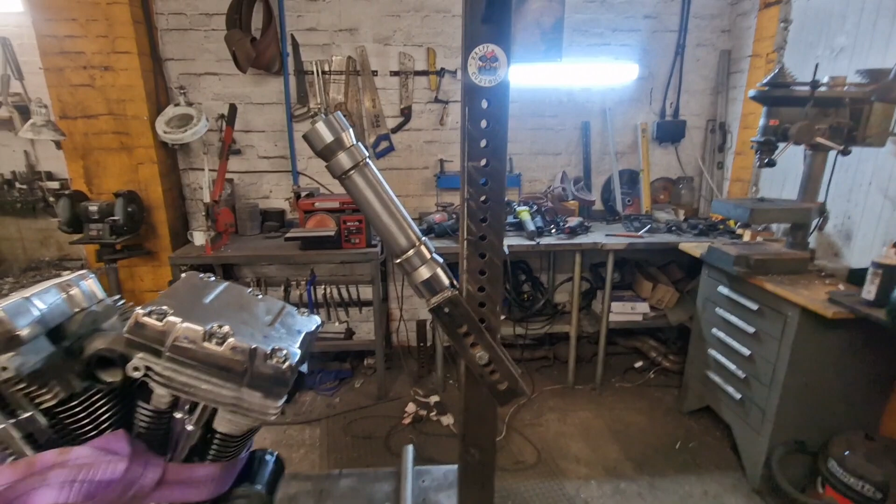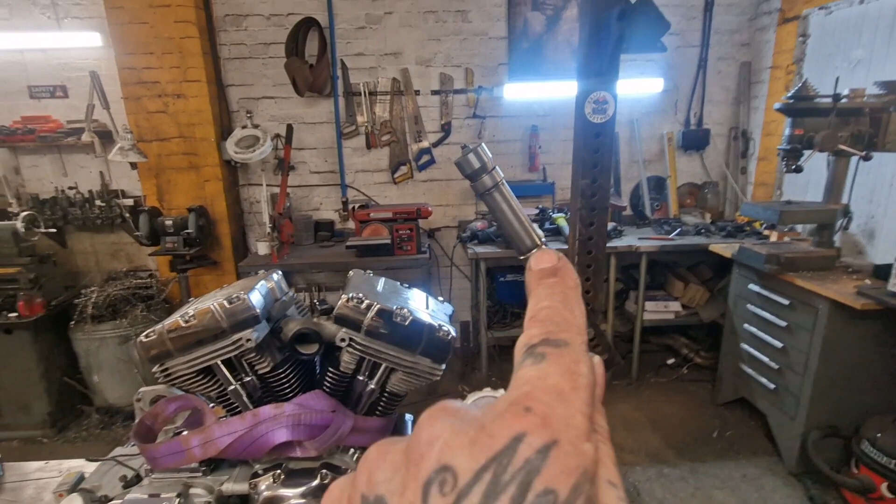I've run a line through the centre of the headstock to the bottom of the frame, which is the jig in this case. We've worked out the length and the angle. We've got 34 degrees of rake - I usually go 35, but we've got quite a short front end. So 34, it'll still look a bit chopper, man, and gives us the height we need on the frame. Yeah, I reckon, got to double check.

From my records and whatnot, I know that I want this gap here, so that's not a problem. We've just kicked that front end out about an inch because it's belt drive, it's fixed length at the back, we can't make it any longer this way. Belt won't fit, so we gained an inch at the front, if that makes sense. That's how we work out where the headstock goes.

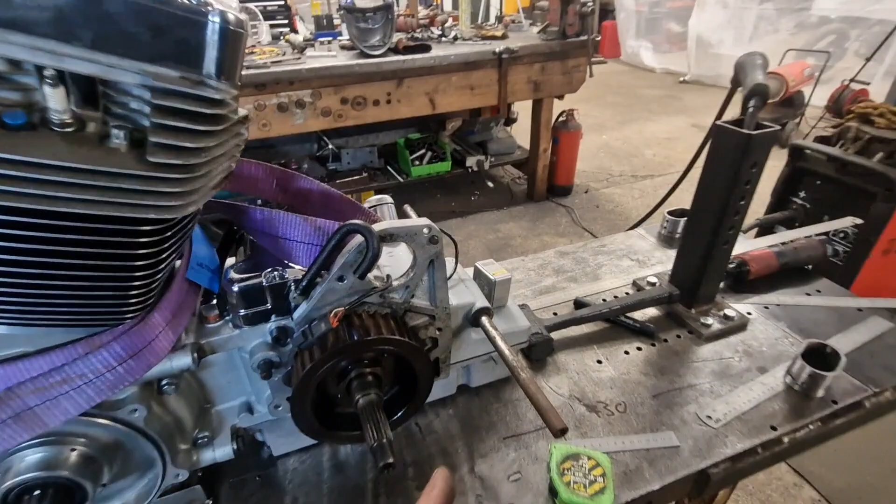The engine, we put a bar through the rear engine mount, which is the swing arm mount on the standard bike, and we use this to get a level off this way. Make sure it's square, and we measure off these lugs down to the edge of the table to see that it's in the middle. We've measured from the back of the bench to the centre of that bar to make sure it's square that way. So we're in the middle, we're plumb, and we're square to the table.

What I need to do is just check the belt clearance once we get the pillbox on, make sure the belt's going to line up. We know we want - wherever I've written it down, you probably can't see it - half inch from the axle plate to the edge of the pulley. So we want to make sure that works, but they only have a 40mm belt and this pulley's a lot wider than that, so we've got a little bit of playroom.

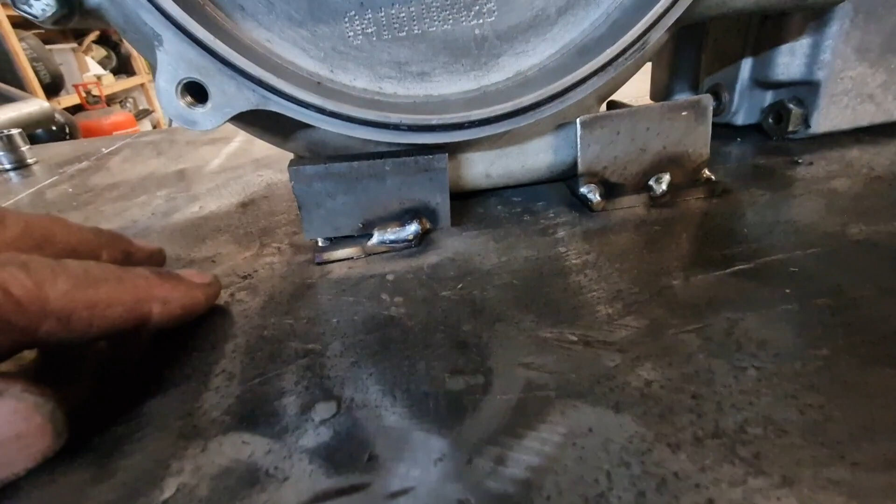And then I make these little bridges, these sprag supports. So there's a bit of angle iron on a bit of plate that's wedged under the motor, and that keeps it level. And then we put a tack on it to stop it moving this way. Same at the back.

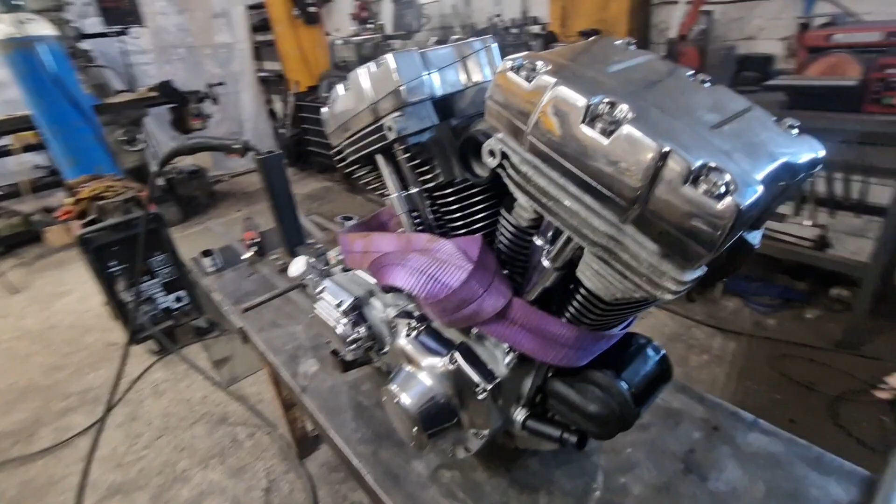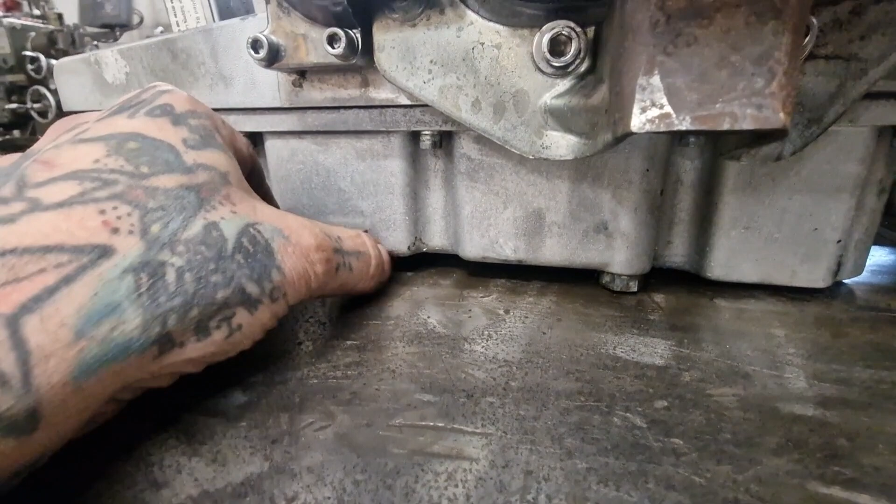And when we go around the other side, because it's held quite firm, like it's not really going to go anywhere, we do the same. Again, you can't really see, look, this one here - so we get a bit of angle iron, I need to space that up on a bit of plate, just so it's firm, and then we weld that to the bench and it can't go anywhere.

These are great for holding on because you've got a big flat sump - not flat, square-sided sump - so you can get brackets on, stop it moving. That'll have it left and right, and forward, that one goes forward, and not sure about the back. We might put something on the back.

We need to measure off the back wheel, 13 and 3/4, to see where the wheel's going to come, to see how much room we've got for a box section that we're going to need here to take this back loop off and these engine mounts off. They're quite monumental, they are. So yeah, if any of that made any sense, that's how we've reached this point.

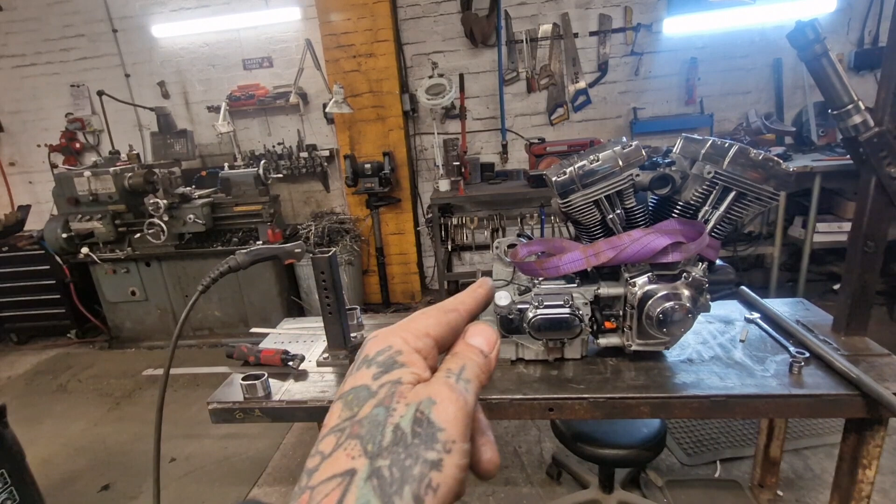I'll get those pillboxes on, and we'll check - we'll get a bit of string across from the front pulley to the rear pulley and see if it's half inch in, it's square. Yeah, it's running parallel, and then Bob's your uncle. We're all sorted, ready to start putting tube and box and engine mounts in.

If you look through my playlist, you'll see the M8, the Milwaukee 8 that I did a rigid on not so long back. I'm going to adopt the same policy for these engine mounts.

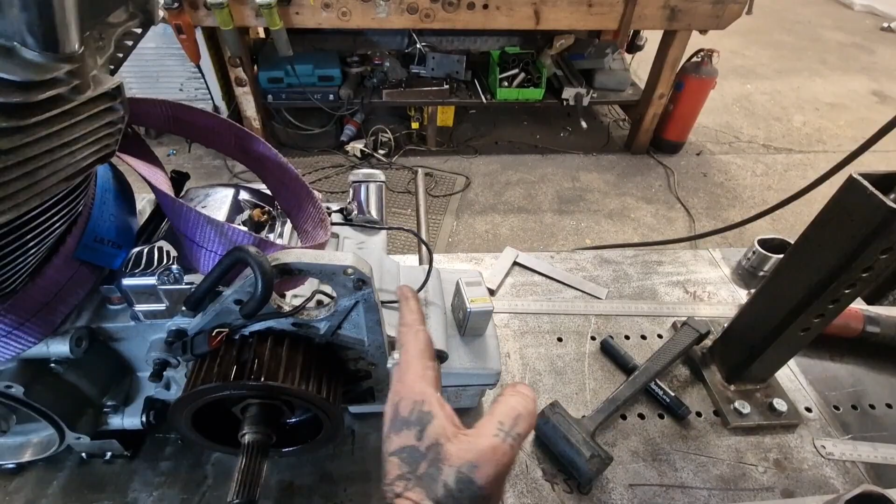So we had Isambard Kingdom Brunel, we're shouting as loud as we can, like Brian Blessed's big voice, on the rear mount, fucking grabbing it, because that's where most of the action is, with the drive being here. On the bottom mount, we're being firm but fair on the front mount - sorry, firm but fair, so not as heavy duty as them, but proper meaning it still. And on the top head steader, which is normally - I've got it on the bench - a rose joint, because these are rubber mounted, so it's a rose joint just to keep this true, stop it shaking side to side.

We're gonna be nice and kind, because these aren't designed to take a proper solid head steader, and I'm not 100% whether they just use the same as on everything. They probably do, but that's my ethic. So we'll grab that firm, we'll hold that tight, and we'll go Billy Big Bollocks on the back there for the engine mounts.

Okay, pay attention, 007. Right, this for me is the hardest part.

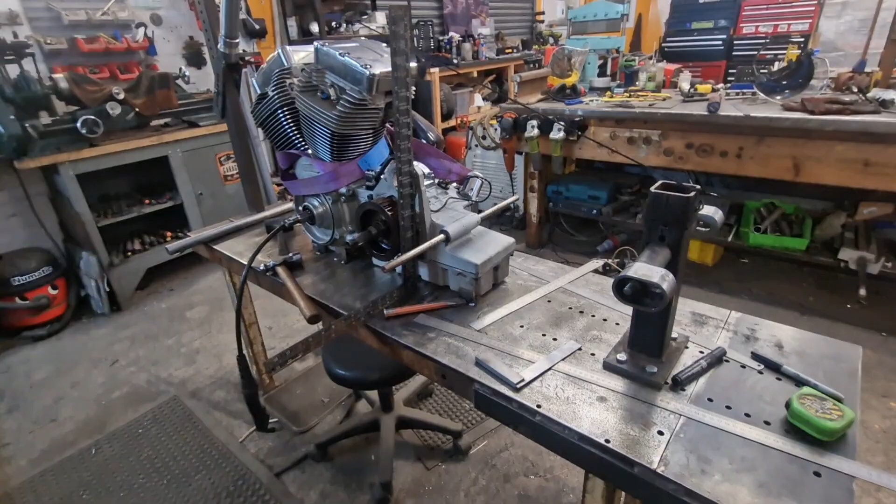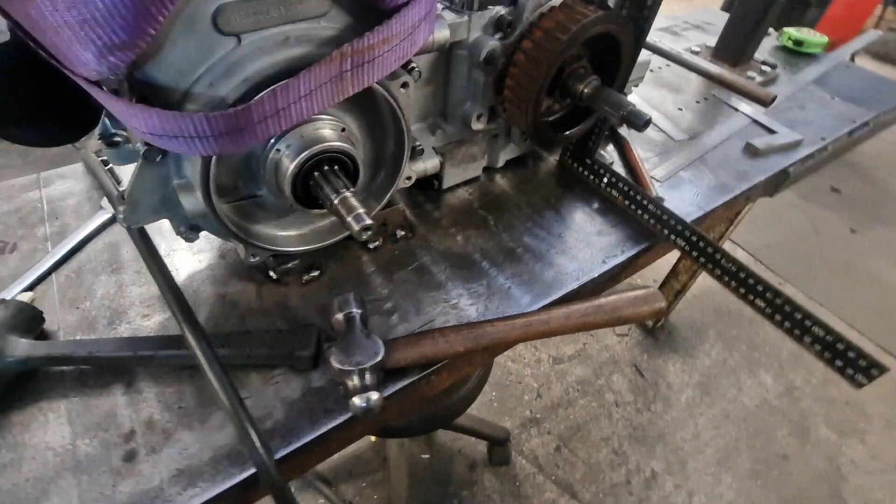People say all the time, why don't you make a fixture that the engine drops on or bolts on, that you can then skate about where you want on your bench. But they're all different, man, you know what I mean? I've got a roof full of fixtures I've only ever used once, so I don't bother.

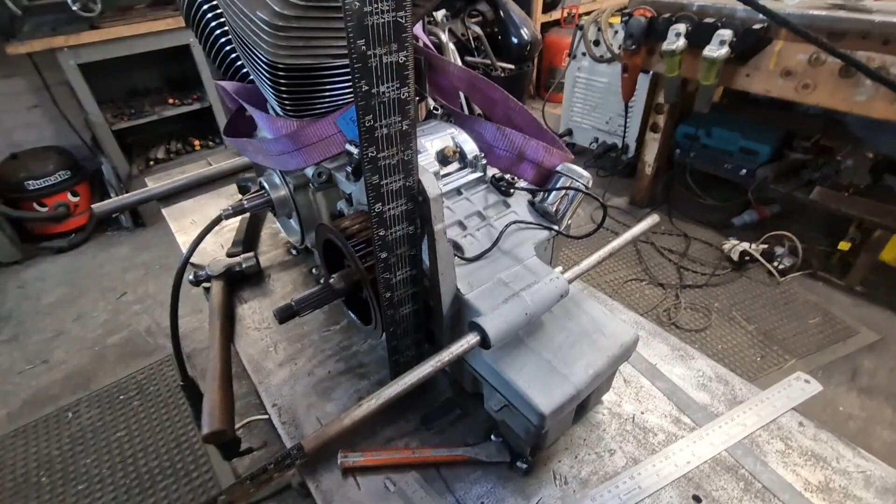I do it like I showed with the sprags and packers. What I've done is got it first and foremost so the belt lines up, and that's where the edge of the pulley comes in comparison to the back wheels. So I put a straight edge off the edge of this pulley, ran it along, Bob's your auntie, everyone's happy.

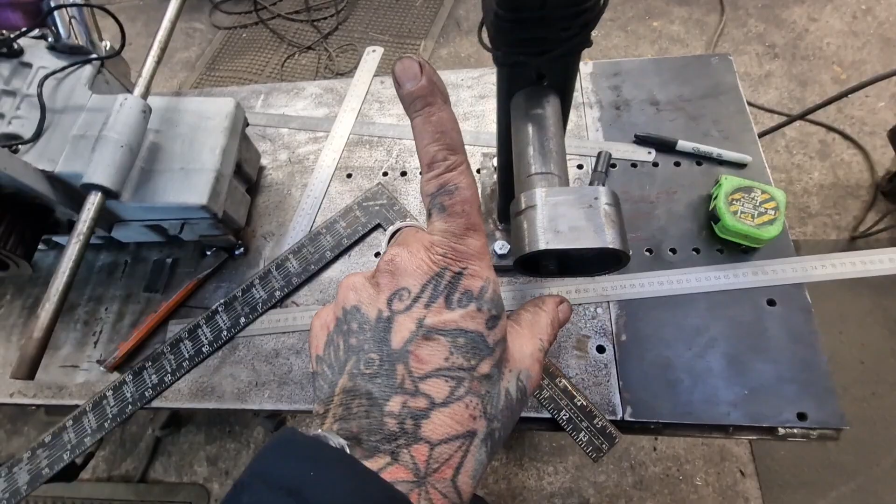And I need to make sure it's square. Like I said in the last segment, it's a couple of hours later for me now, so bear with. We measure back from here to the bench to get it the same. We put a zero angle finder on the bench, then put it on here to make sure it's zero, and put a square up there to make sure it's square.

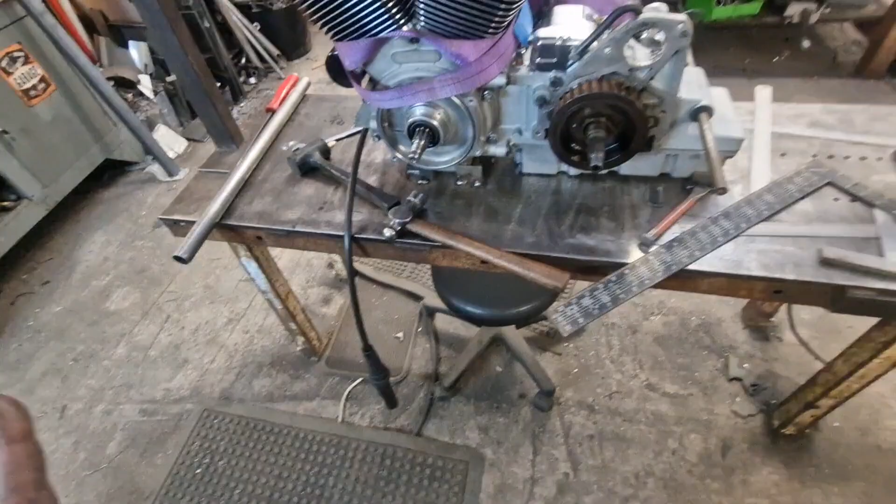Then I measure again - I put a straight edge across here and measure up from the edge of the bench to the straight edge at both ends. Just as a sanity check to make sure we're not messing this up, you know what I mean. It all ties in lovely.

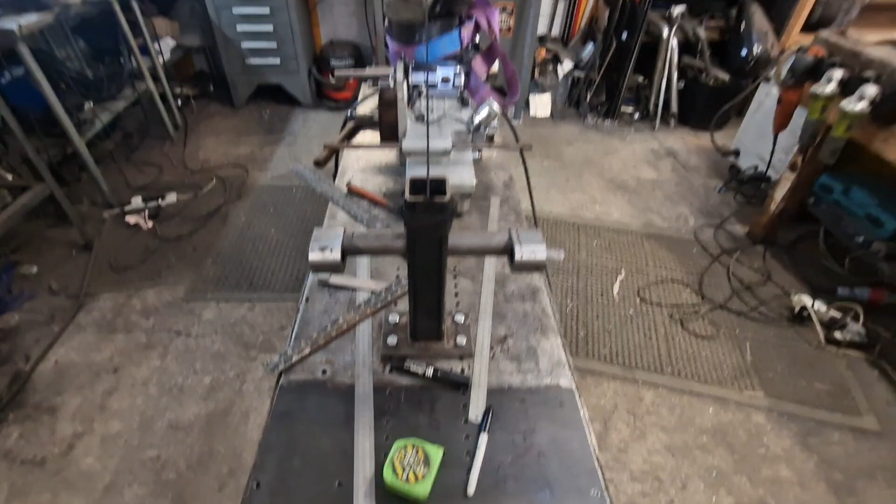So I'll strip that out, clean all the crap off the bench, but that is jigged up. There's the rear axle plates, that's 8 1/2 up, with 13 1/4.

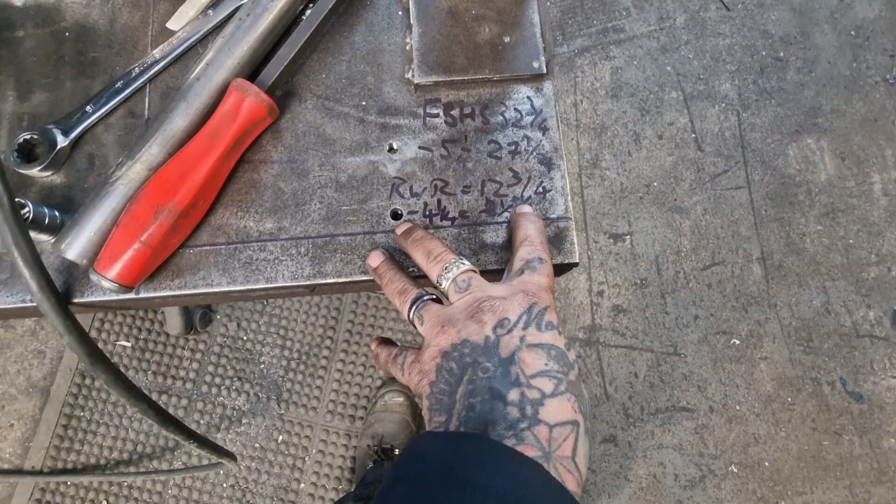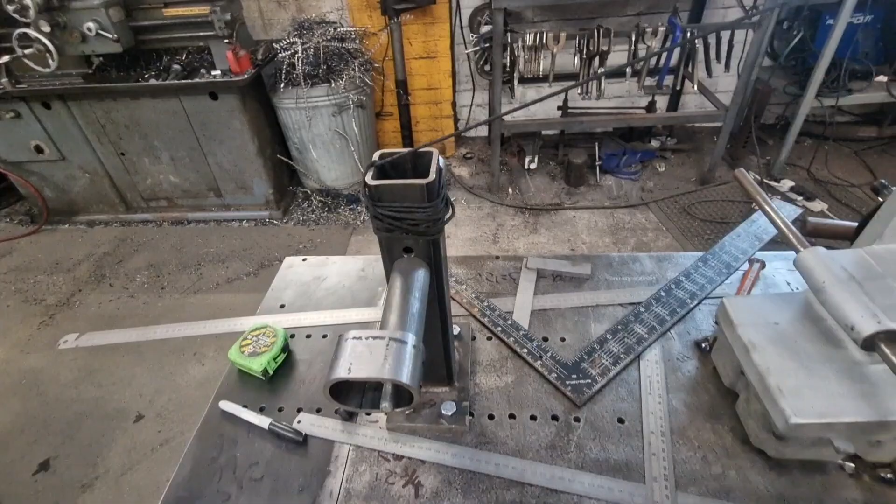I'm not reading it right. Rear wheel radius is 12 3/4 minus 4 1/4 ground clearance gives us that 8 1/2, which is what that is - that's at 8 1/2 off the bench. If I'm talking gibberish, please excuse me, it's about time for my morning coffee.

And the headstock set, how we said, that all fits through. So we've got 1 inch more ground clearance at the front than we have at the back - just about 5 inches here and 4 inches at the back. So when you're going along, that moves up and down and sits level. Everything lines up, we've got a decent gap here. We're sorted, ready to start laying tube, more or less.

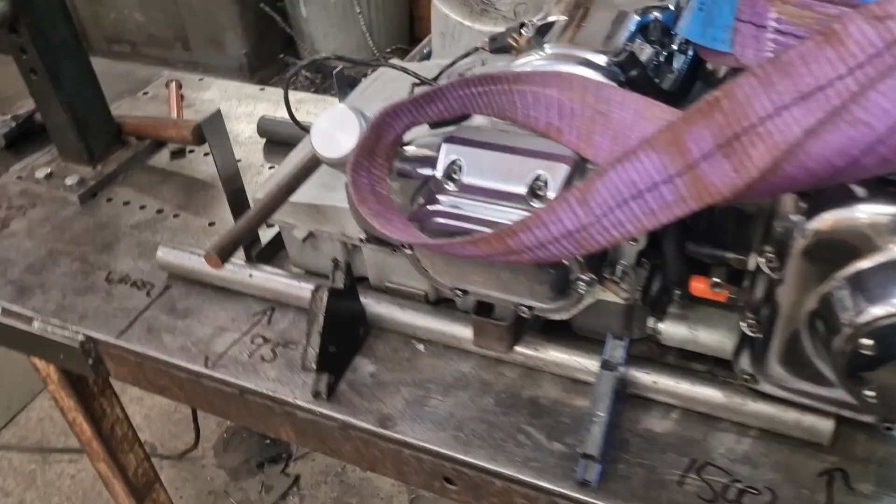Right, so with everything cleared away, more or less, we've laid out and mocked in the bottom rails. There is a slight issue - let me zoom out so it's not so jerky. There you go. I know this one's a bit tricky, I've done loads of these. 95mm from the edge, I'm happy with - it clears everything, it don't hang out, that's good.

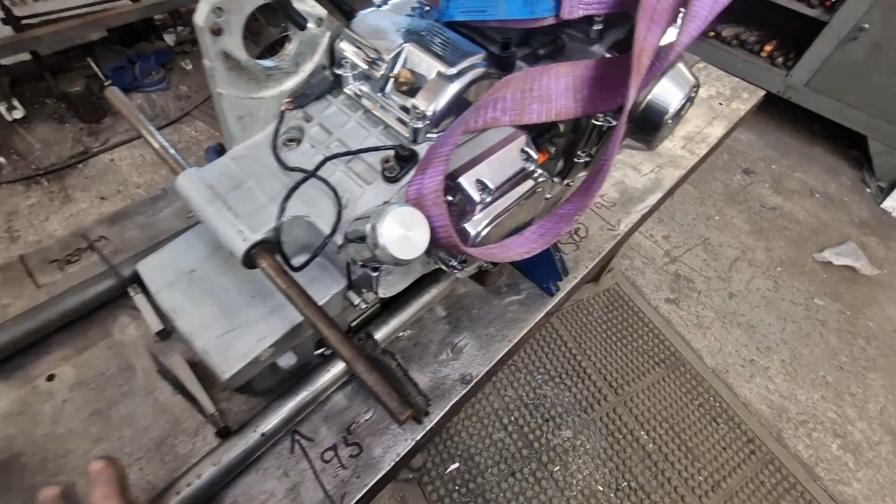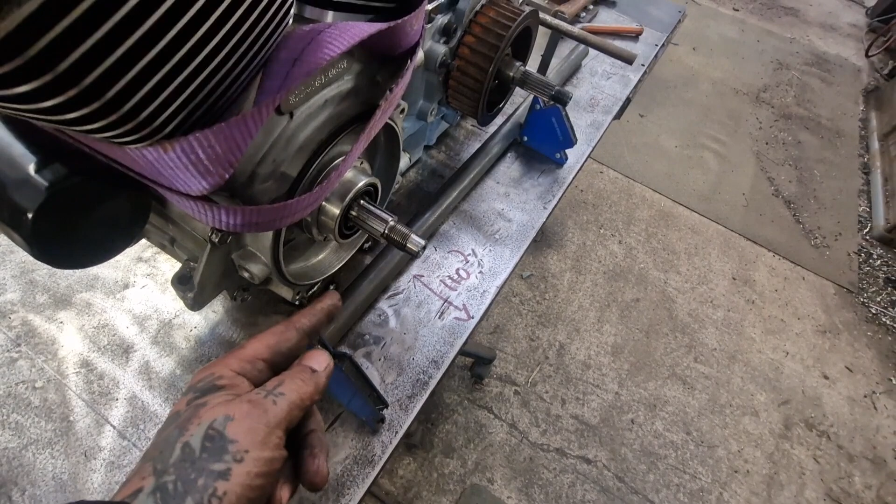This side, I'm waiting for the inner primary. I normally work to the inner primary because they're a funny shape and you need to thread this rail through. So I've guessed - all I've done is guessed at 110, which is not ideal.

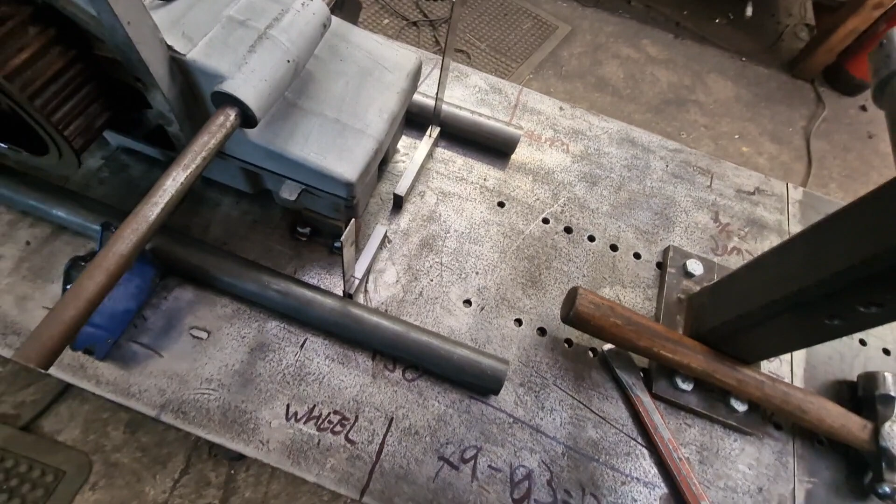What I normally do then is measure for a bit of box section across the back there, put the box in and tack it to the bench, and then I've got a solid foundation. It'll grow from there, like Odd Bod Junior.

So I'm a bit stalled out, to be fair. I don't want to guess this and then it's too short and I've welded it in and got to twat it off the bench and all that - I ain't doing that. So what I've done, I've got the bender in, set up, ready to rock and roll.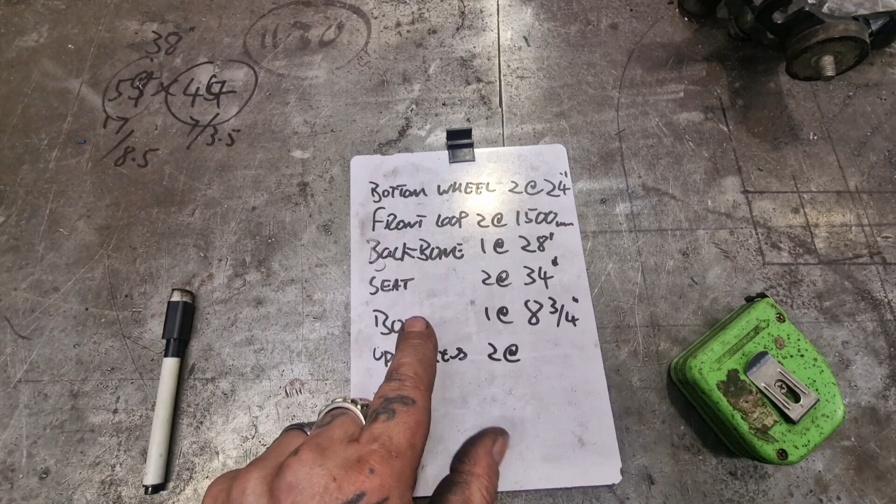I've done myself a cut list, yeah. So these are all over length, apart from that box, which I'm not sure about - I'll probably leave that until I've got the cover. But I'll get these rails cut, I've had a good guess.

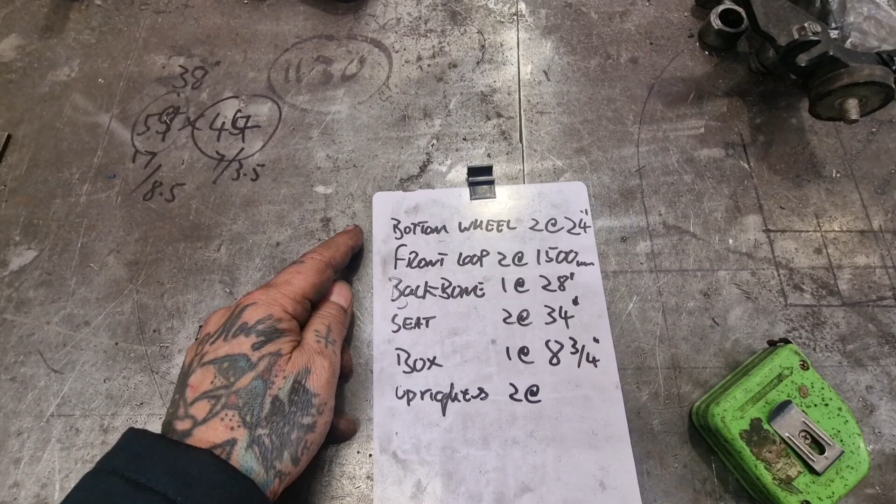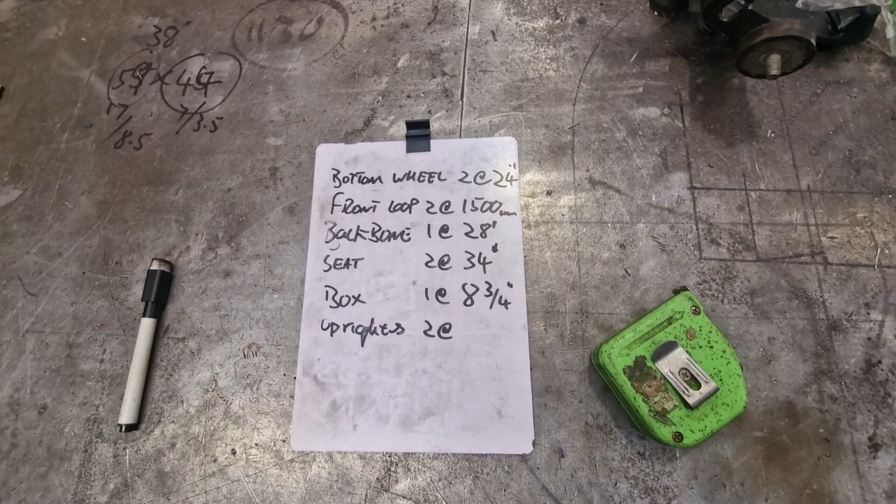Got the ones for where the wheel is at the bottom, the front loop ones. You'll see there's a mix of 24 inches, 1,500mm - I don't know why I threw that 1,500mm in there, but there it is, we're all right with that. I'll get those cut and await that inner primary, I guess.

Although I could make a start - I could bend these up and have them running through, because they're going to go where they're going to go regardless of that, so I could do that. I could also get the backbone in, although it's a bit arse about face for me, so we'll see.

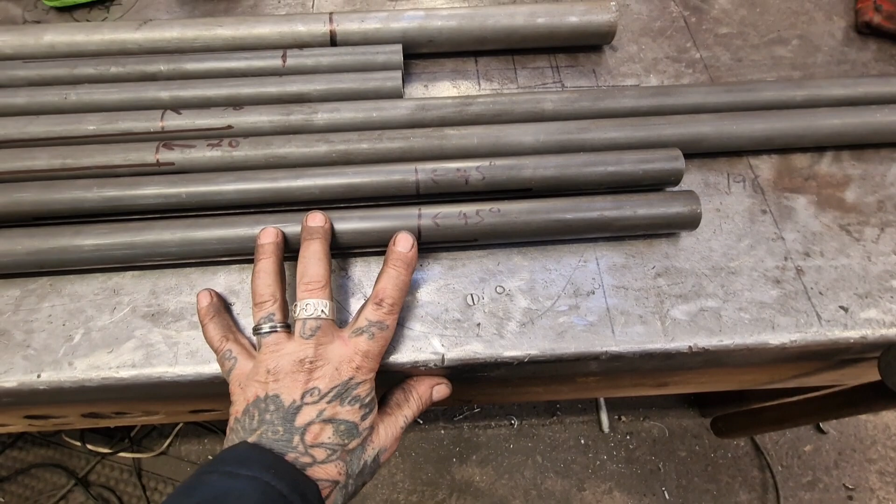Right, so what we've ended up with is a frame in kit form, look. We've got all the rails. We've worked out all the rails and cut them too long, and we've worked out where the bends are going to be and allowed ourselves a bit of a guesstimation, because it's not the easiest thing to map out where this bend needs to go and what angle it is.

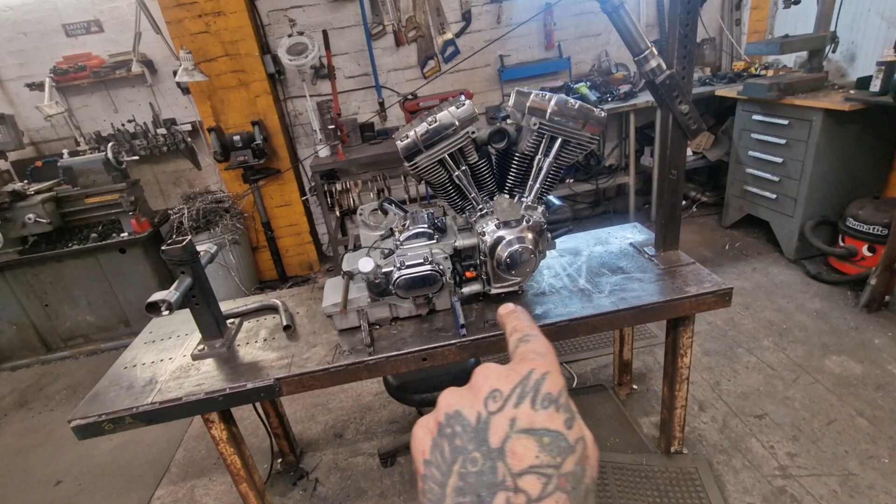We're going 700 from the end and 70 degrees, which with my split rule and my cheater - I'll show you my cheater, look, if you're interested. This is a bit of... oh, it's not my cheater, hold on, bear with. Here's my fucking cheater right in front of my nose, look.

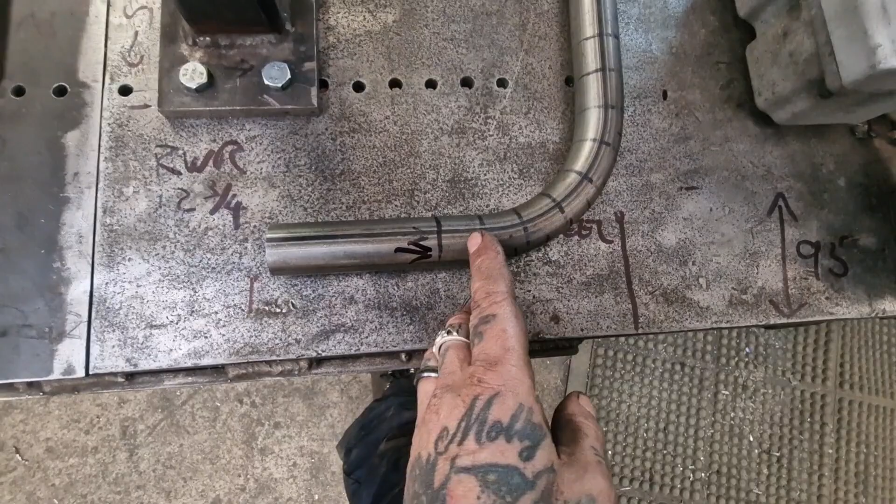So 4 inches from the end, the bends start, and they're inches, yeah? And these marks are degrees, so I can count those off. I can go 10, 20, 30, 40, 50, etc. And I can see how many inches of tube it takes to get from there to there where the bend is. And then I can measure off to where I need to be. So that's what I've done.

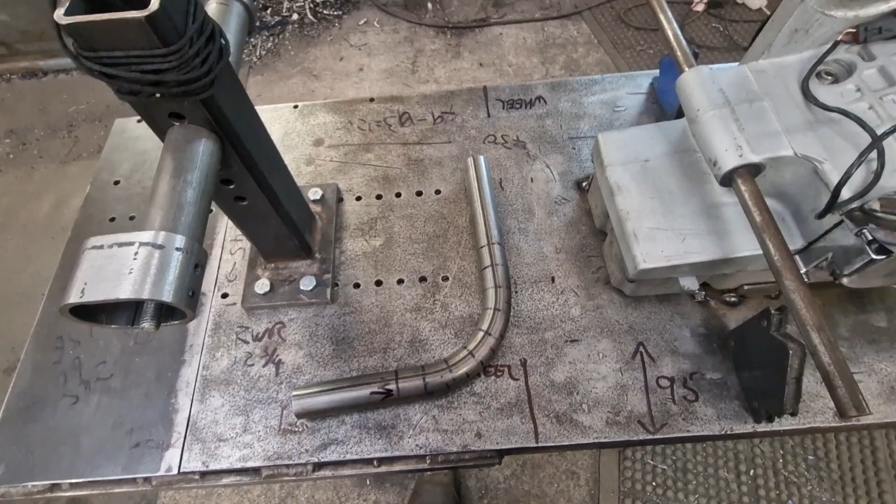I know the backbone's coming here and it needs a kink in it. I've already offered that up, and it don't want to be straight. It wants to kink from here down towards the seat rails. So we've marked that, and we'll do that. We'll slice that and bend it and weld it up, because I can't bend that. And so on and so forth with the other rails.

There's the bottom rails for the bottom wheel, where the bottom wheel goes. They're bent at 90. We're going to do a U, much like Andy's Milwaukee 8, as I mentioned. These are the ones that can be trickiest, so I'll probably do those first.

I'll just show you what I do, look. So I mark where it wants to be, and I mark on 70 degrees as a fucking reminder, because I forget my bollocks if they weren't in a bag. And then I put a straight line, just put the marker pen and move it along the bench to give myself a bit of a straight line, and I'll line that up with the top of the former. So I can always put it back in the same place. Yeah, so we're on that line, back of the former. So on and so forth.

I suppose really I better finish my coffee and then fucking get my big boy pants on and bend them rails to 70 degrees.

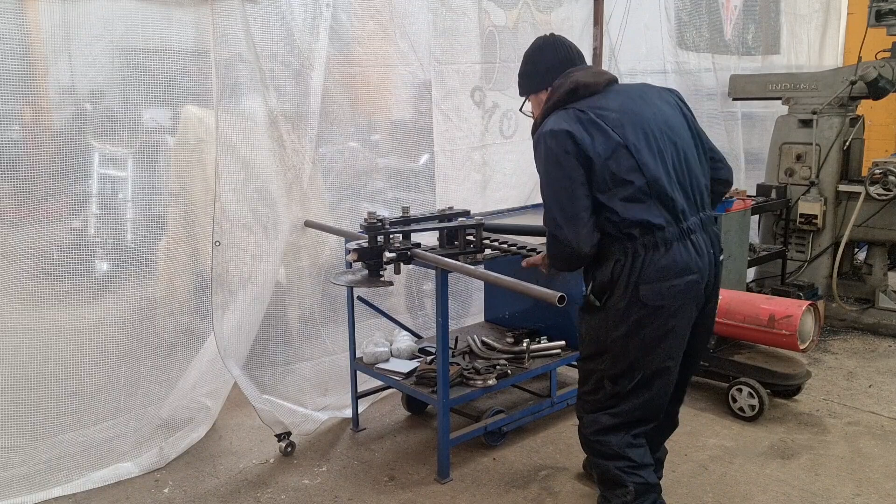They worked out lovely, look, I reckon. Maybe snug them back a bit more, but we're going to be getting close to this, and we don't want to be, do we? You know, we have come out, the front's come out a couple of inches to give it a better stance, like. So, yeah, that worked out great. But fuck me, I forgot how hard that shit is to bend.

Right, what I'll do off camera, I'll do the two seat, the bottom wheel, back wheel rails, they form a U. They're joined together where the box section is that I can't cut yet. But we can pre-bend them to 90 off camera.

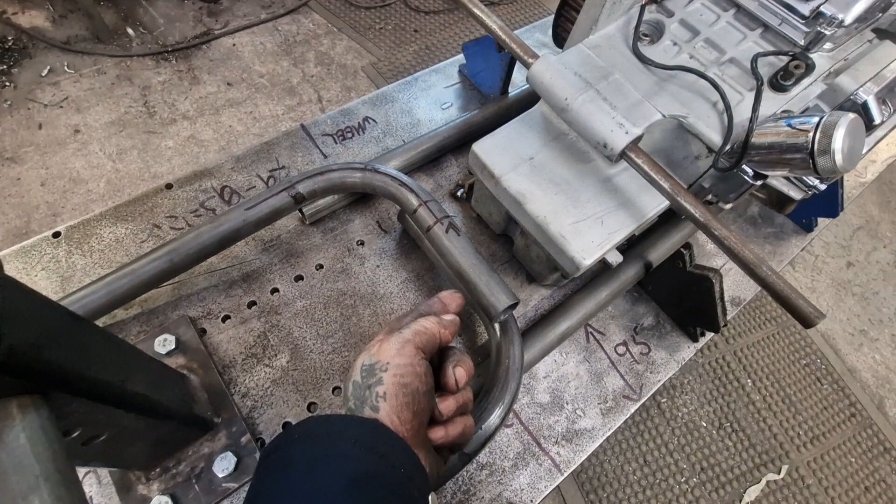So we're continuing on with the frame in kit form, available at - no, I'm joking. Right, oh fuck me, I'm bollocks. 90 degree bends ain't easy. You have to really fucking clamp the tube down before you start to form it, otherwise this creeps in the former and squishes out. So I've had 3 goes to make those 2.

There we go, so there's the front rails. There's the back rails. I think next on the order of operations, we're going to start and get the backbone in. That's what we're going to fucking do. We can do the backbone and the seat rails, can't we, without knowing where this has got to go and where the box has got to go. We can do the top of the frame to a degree.

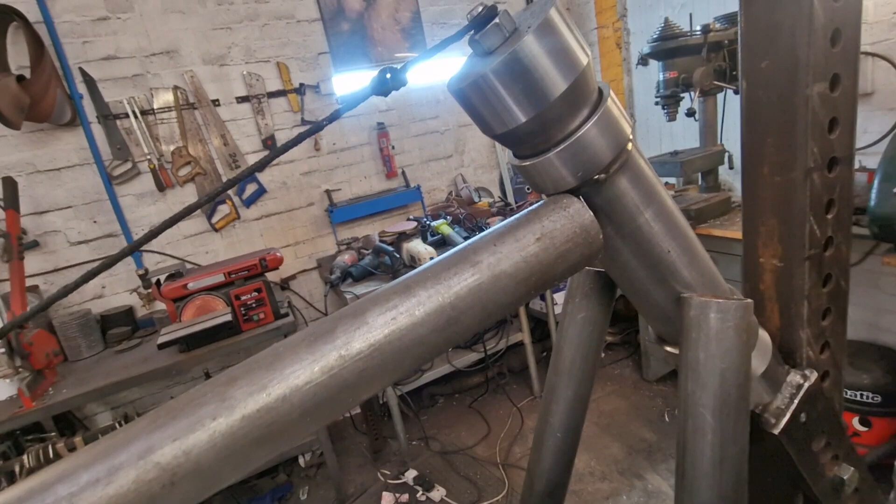So we've got this backbone. We know where it wants to kick in it. We'll offer it up first. And regular viewers will know my method. So we offer it up where it wants to go. We see it's got a bit of a chunk of a fucking gap there, look. So we slice the top out, shove it up and go from there.

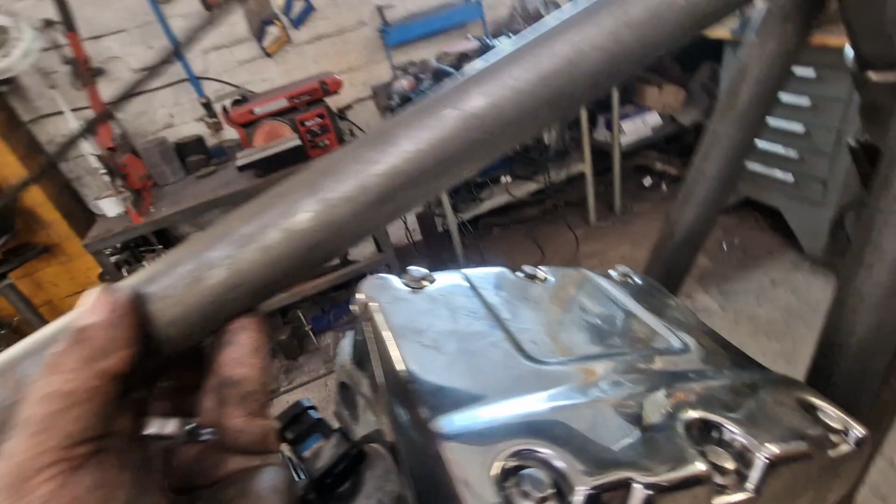Right, so with that suitably cut and given a quick fettle, we can see that it sits quite nicely. Look, if we just lift that up, and then we're going to kick it down from where that pen mark is, yeah, towards the back end. So we'll give ourselves a finger or two's gap, and I'll cut that.

I'll just, like I said, I can't fucking bend this shit. So what I'll do is I'll cut a little slice out, put a kink in it, and test it for angles and all that malarkey and go from there.

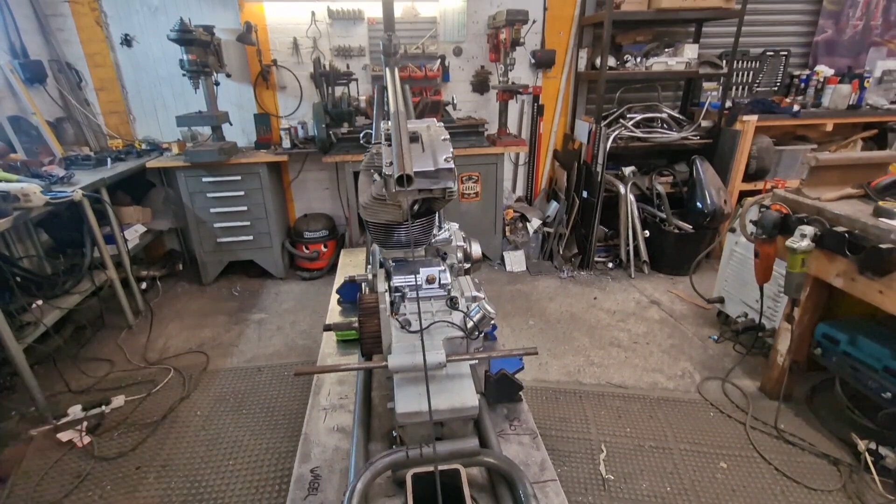Righto, if you can see what I can see, then this straight line down the middle of that top tube, the backbone, and with that kink I've just made, it does follow a nice line. It's not going to be exactly pointing at where the seat rails are going to terminate.

There'll be another slight step in the seat rails, but that's absolutely fine. I don't want to go any lower on the motor because it's got to come in and out, you know what I mean? You might want to take the head off or the rocker box while it's still in the frame, so we'll give ourselves a bit of room.

I think that'll be absolutely fine. So I'll get that tacked on there, and I'll tack this joint up as well, and then we're onto the seat rails.

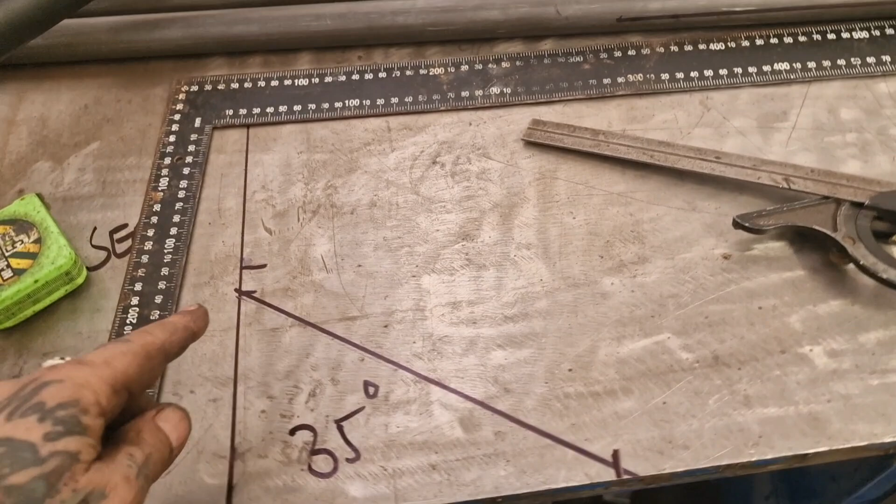Right, we've marked out for those seat rails. Sorry about the shaky camera, I've got to get an updated phone or something.

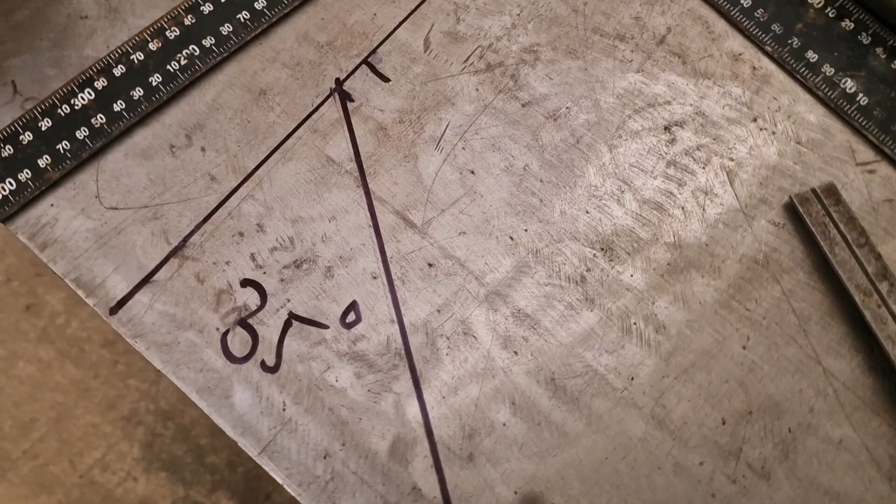We've gone 8 inches back, which is where the bend's going to start in these rails that you can't see. I know that they need to come to this point. I've measured up the width of the axle - there's a centre line at 12 and 3/4, I think it is. Might be 12.5, can't remember now.

But we know that the outside of the frame rail needs to follow this line and off that way. And then it will be cut for where the backbone is. There'll be an equally distant one there, going off that way.

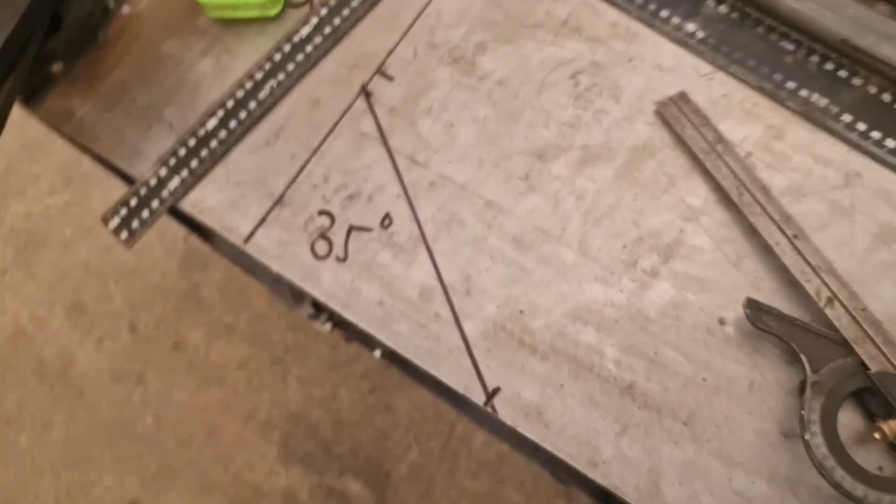So we've done our mapping out and worked out that it's nearer 35 degrees, Ralfy, not 45 degrees. So that wasn't a good guess. We'll get one in and bend it and offer it up and see how it looks.

Right, these are well long by the way. They were 39 or something on the shelf, and I want them a lot shorter than that - quite a bit shorter. But you can see 35 degrees, look.

If you look along there, that follows the bench. It goes off where I've marked it, and it comes to the termination point right at the end of the tube. So I can cut that off straight there.

We're up too far off from the backbone. Let's put it down.

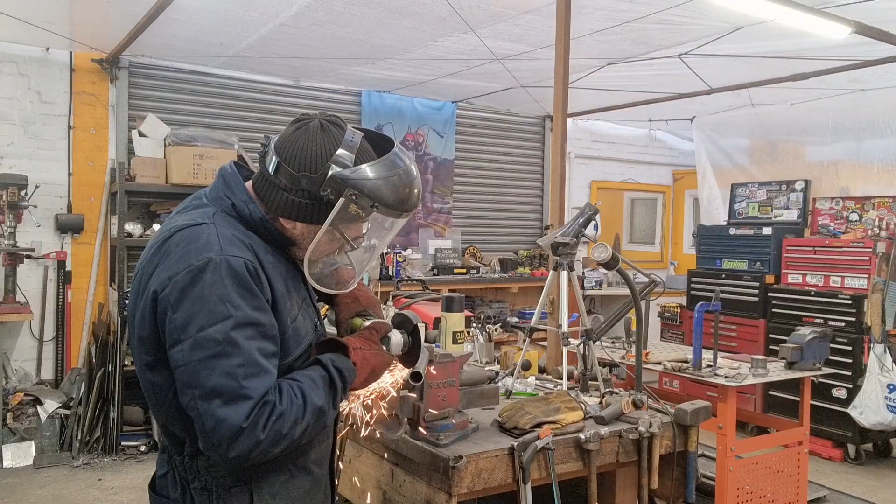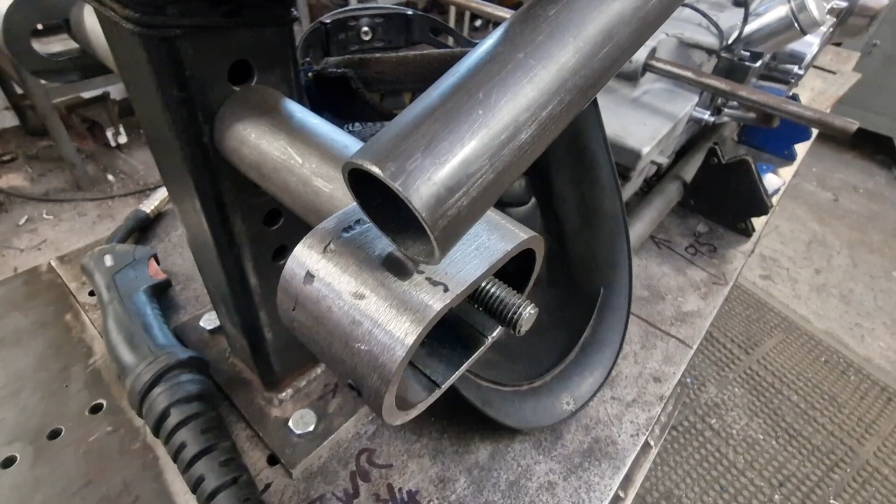There you go, like so. Now what we need to do is mark it for meeting that. We need to slice it off there, and I can't film myself holding that level.

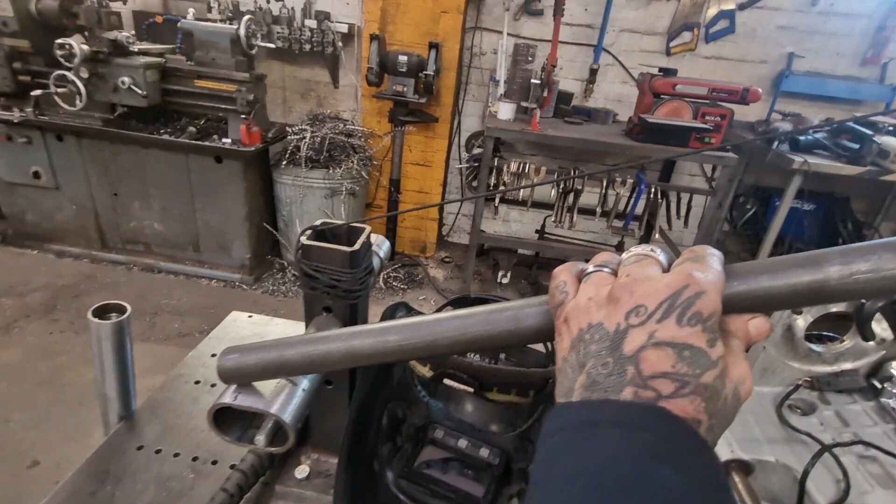So it needs to go about there. I'll put a mark up the top where I want it to start, ish, and I will trace a line parallel to the bench - parallel to the pillbox doodah - for a slice, like so. It'll drop down.

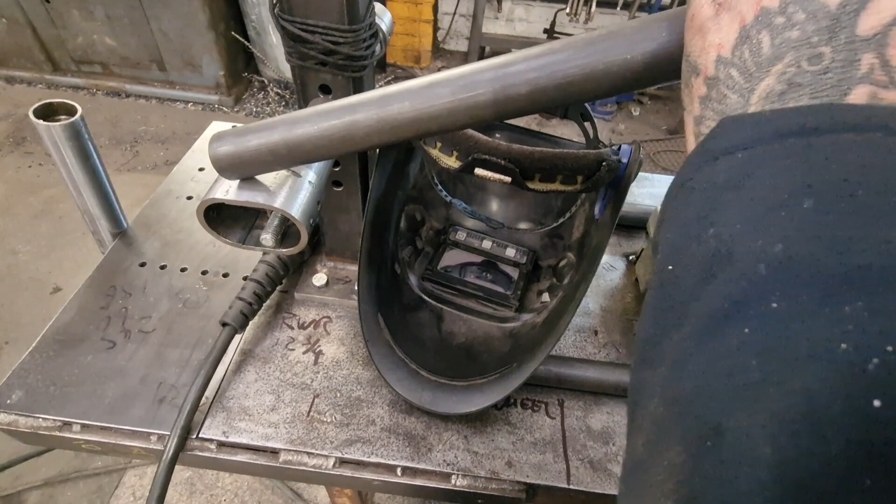So we'll angle it slightly, if that makes sense. We won't follow the shape exactly, because this tube's going to drop down. It's not going straight down, it's pivoting from this point.

So we'll trace that, but we'll have too much of a gap. We'll angle it down a little bit - too much of a gap at the back or too little at the front, whichever way you want it - so it drops down nicely.

In theory. And ta-da, there they go - seat rails are in.

Sit lovely. I've had the angle finder on them, 24.2 degrees each or something like that, so we won't have any of that half a degree out nonsense. If you know, you know. I'm only joking - I'm not joking, I've measured it like.

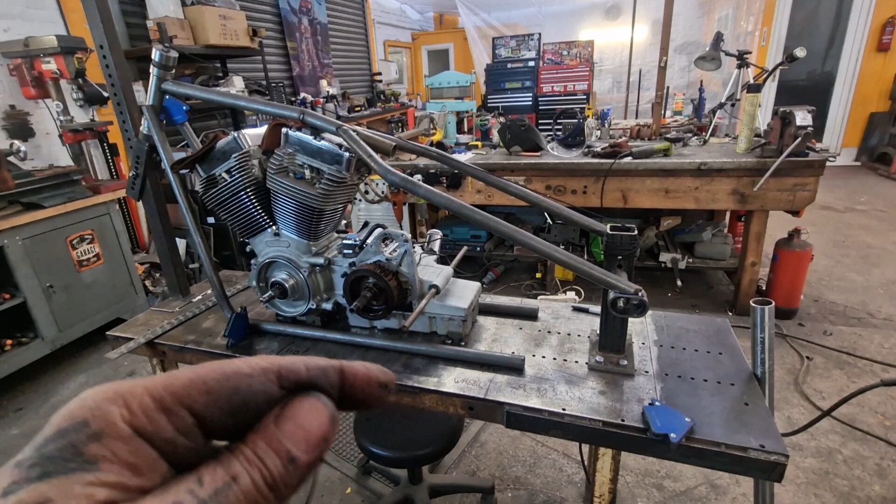So without this primary, we can't decide where this rail goes properly, because we need to find a path through the primary. Without that, we can't work out the length of the box section that's got to sit behind the engine, that the uprights are going to come off.

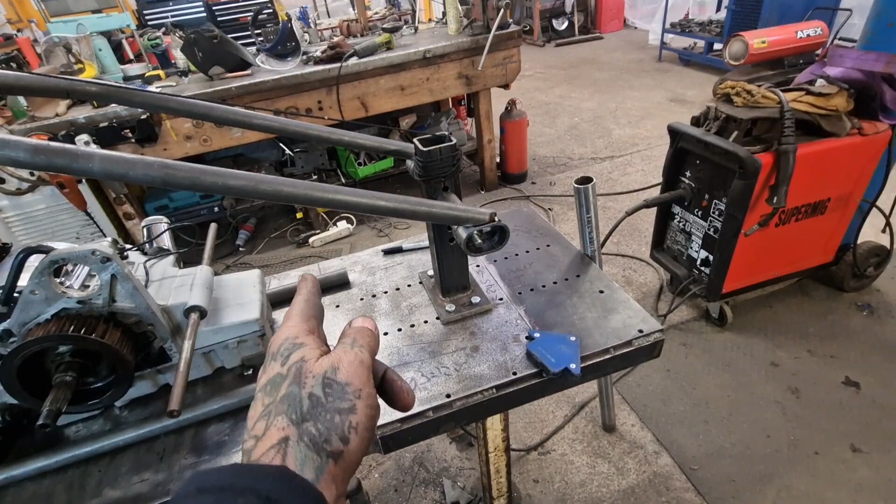And the U that will go to the rear wheel - there's a U going in there. I could make the U.

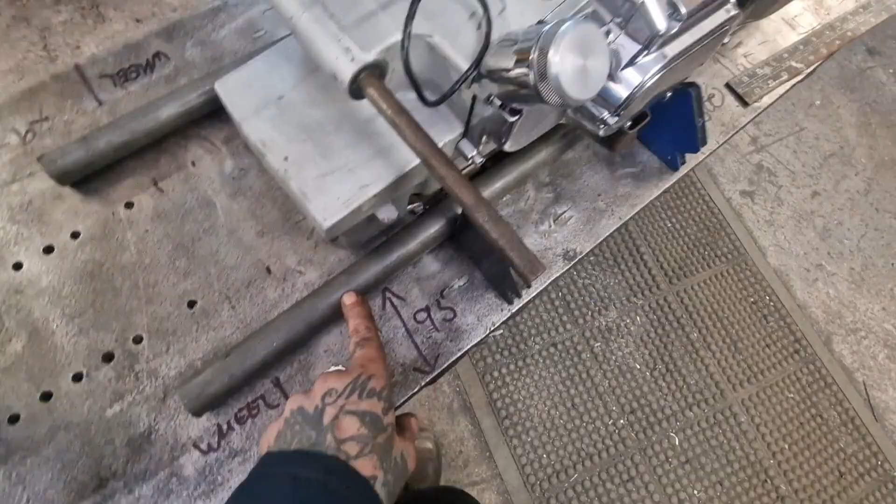I could mock up a bit of box so we could shape this one, get this one in, couldn't I? Just tack a bit of box on where this one's going to be here - don't worry about that bit - and that'll give me a datum, something to work from, I guess.

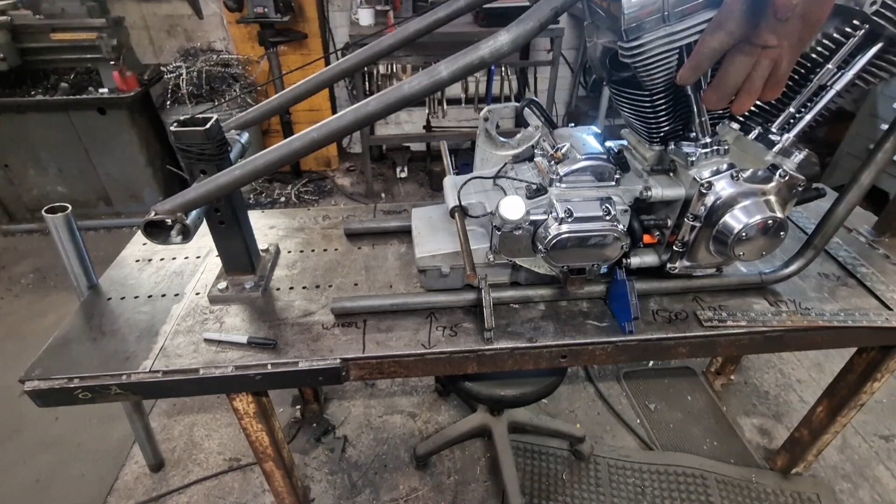Yeah, fuck it, why not? So I've dummied in a bit of box just to see where we're at here, and I'm going to make this bottom loop. I'm not going to be able to fix it, but I've had a sanity check with that bit of box and it's going to fit.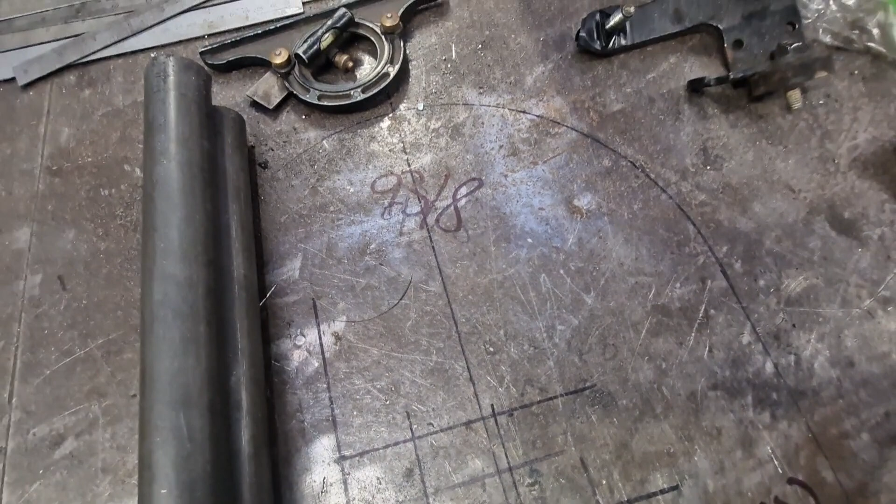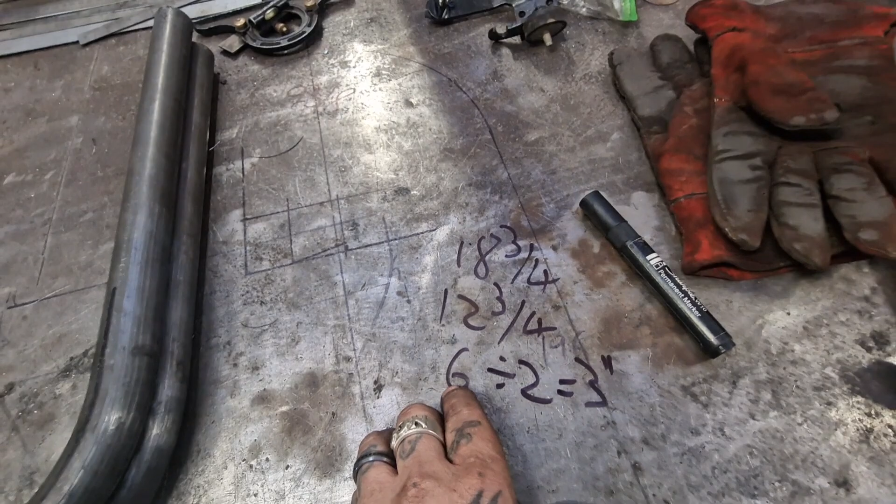Right, so what we've got is these two L shapes that I made, these two 90s, and from there to there is 9 and 3/8. So together they are... 18 and 3/4, right? Now we want 12 and 3/4, which is 6 inches less. So we divide that by 2 and we've got 3 inches off the end of each one, and when they join up they'll fit the axle plate just peachy.

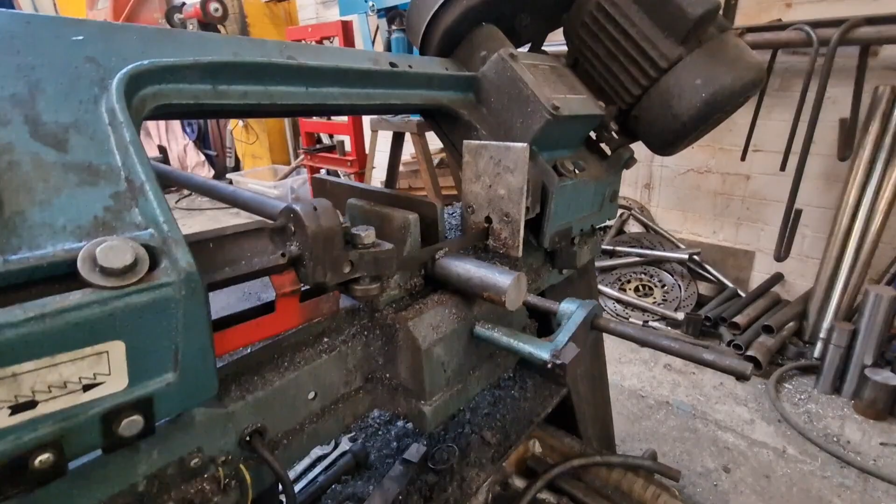So I'll get and chop that off in the chop saw, and then we need to make a slug, so we'll be over to the lathe for a bit. As is customary for these jobs, we'll have a bit of bandsaw action - just give it a squirt.

I cut some massive bright round bar, 75mm or whatever - it's a hydraulic rod, I should say, from when I was making the last set of head stocks. It's not done the blade that much good, but we're still getting there. Not ready to change it yet. I'll be on this 32mm or 30mm, whatever it is, in a minute.

Flat bar - ooh, tightened up. Give it a quick test cut, give it a quick clean up, see where we're at. It's not quite clean.

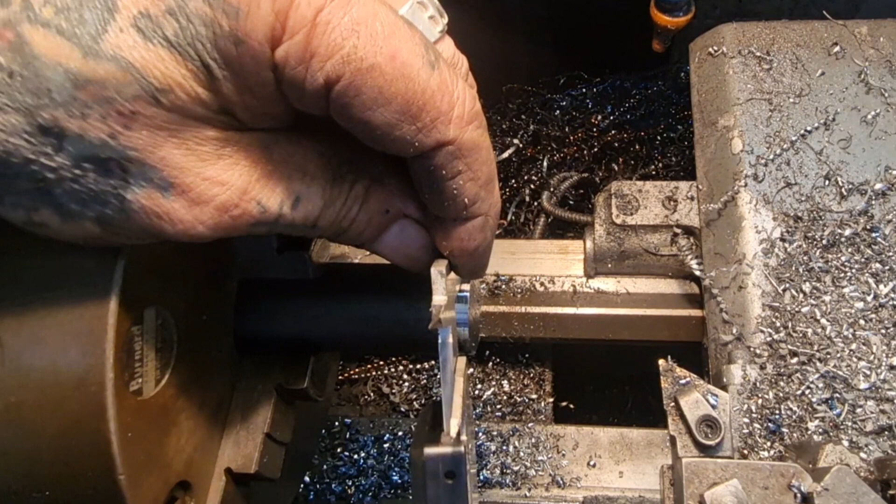So 3 inches long, and it wants to be 27.5mm on the outside, and about 22 down the middle, just to make a sleeve to join those two bits. So we are at 29.22 out there - it's 30mm, isn't it? 29.27, sorry, I'm not showing you very well. I'll take that, I'm happy with that.

So X, 29.27, enter, and we want 27.5, don't we? Which is going to be one single cut.

Come on, somewhere around there. Hold on there - bang on, 27.500. We were cutting that, and it's just jumped. There we go.

And away she goes, Captain. We'll get that machine down to the chuck - she's had a red hot chip bounce off my forehead, as if it's not had enough shit this week. So we'll get the outside of that machine down, I'll flip it round, do the other end light off camera, and you can join me when we're putting it all through the middle and chamfering the end.

So that's spun round and machine down. You can do the usual - in with the centre drill to start off with, just peck away at it, steady like that. My tail starts sliding back a bit.

You know what we need, don't you, boys? Exactly. Look at that, whipping into that now.

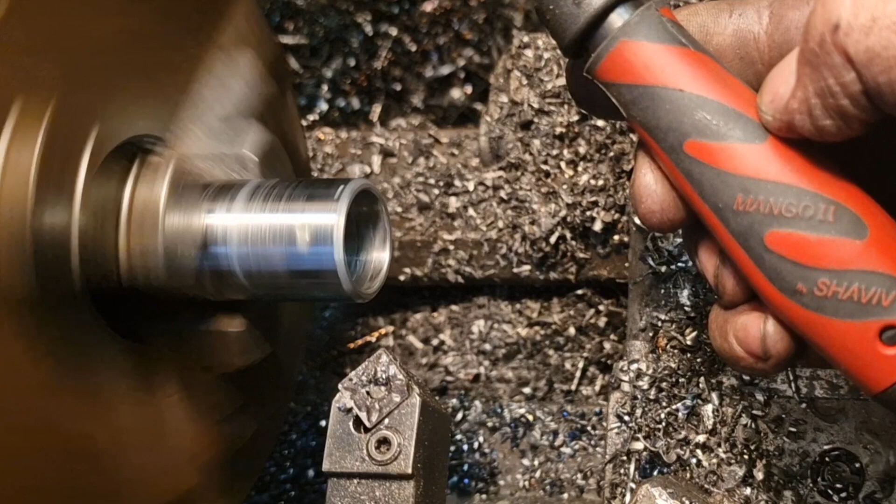Well, put that off and break that edge with my new tool that I'm really happy with - Mango 2, Shaviv, I'm guessing. So it works - happy days.

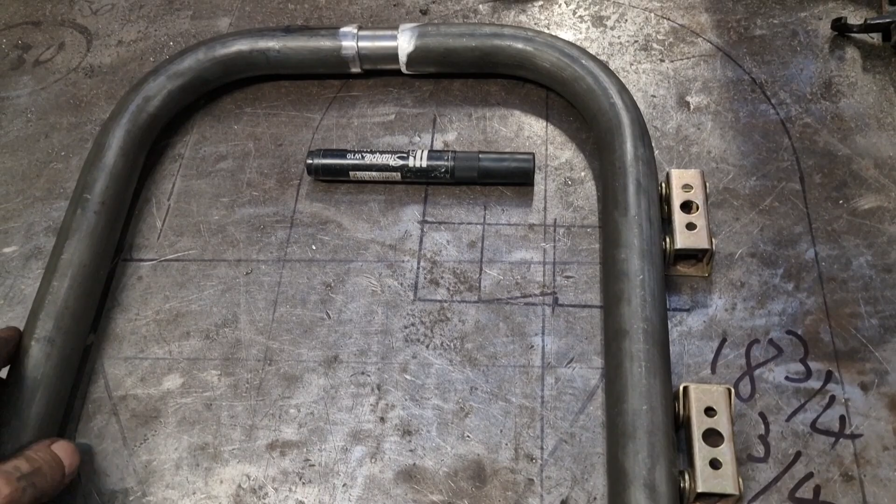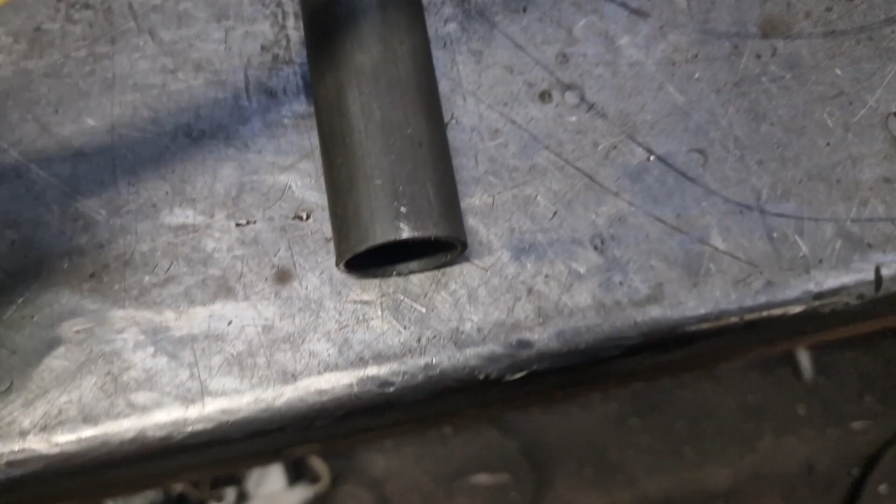Bear with - we're at 12 3/4 outside, so we're looking about a little bit more than that. We'll square it all up before we weld it. In fact, what we'll do, we'll do it in 2 halves.

We'll fit it to the bike in its 2 separate pieces - fit one side first, and then the other side's a lot easier that way. So yeah, we're gonna get there, aren't we? Sorted - so that's it, that bottom U made.

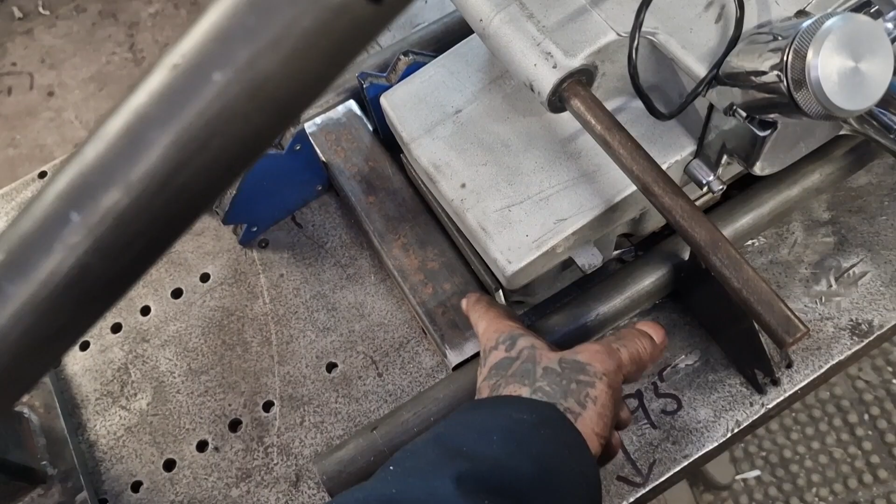I can't trim this off to suit - I don't want to trim this off to suit, I should say, because we're not sure of the thickness and length of this box until we get the other cover. I could start chopping this out and dropping it in, but I've had a long day.

Yeah, follow along for the rest of it - I'm done, I'm binning it. That's been a productive session, that has. So it just leaves me, as always, to say follow along on the next instalment to see it.